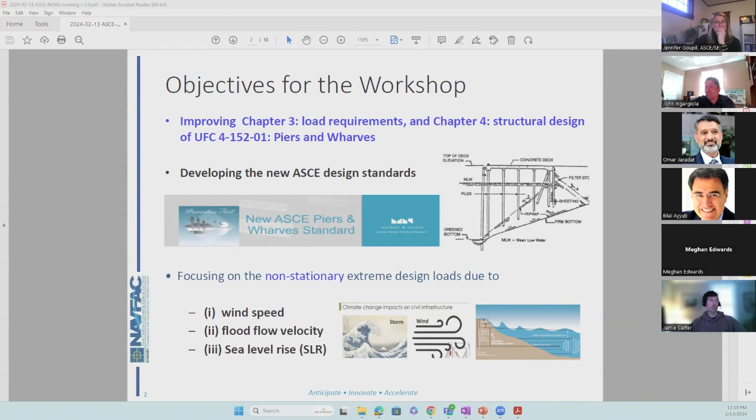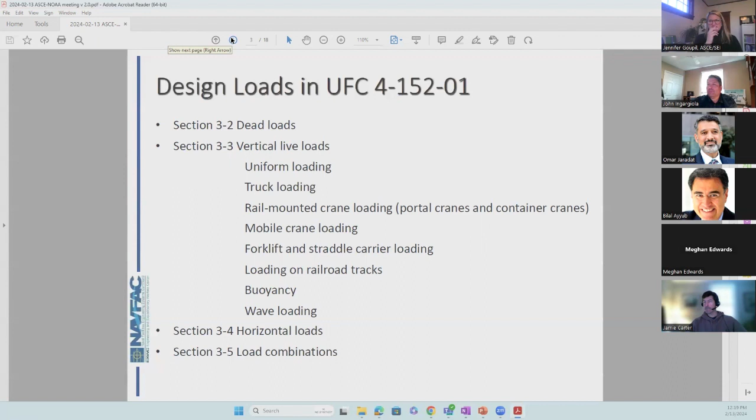Next slide, please. However, when you look at the horizontal load, the berthing load, and the mooring load, wind load on the structure, and the load on the piles, including the current load and wave load, this is much related to the climate changes. It's climate sensitive parameters. That's what we need to consider during the design of piers or wharf. And next slide, please.

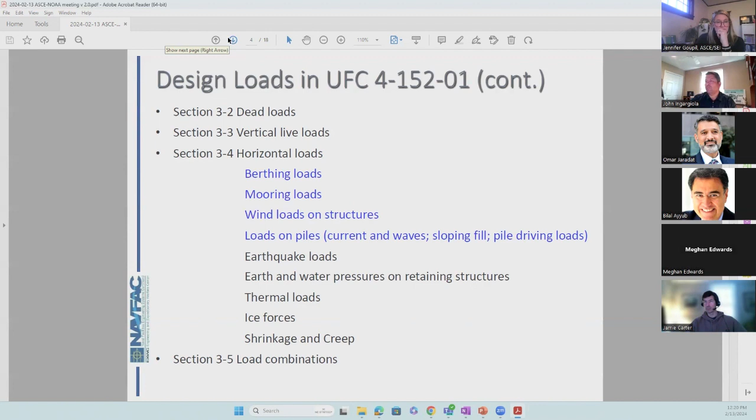Before we jump to the question we're discussing for the workshop, I want to report to you the registration status on my workshop. There were 77 people registered, about 70 people showed up. Half of them from DoD side, 12 people from NAVFAC, 12 people from US Naval Academy or local people, and 11 from the US Army Corps of Engineers and the Air Force. We had 15 industrial people from consulting, and the rest of 20 is university professors, academic. Next slide, please.

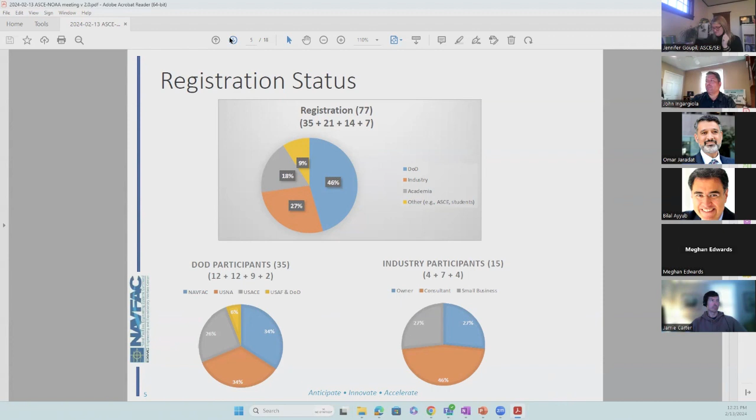Before the workshop, we did a survey, what we want to talk about during the workshop, what is interesting, and the 4 topics: wind, flood, sea level rise, and the resilience. Next slide, please. So this is a summary of what we found out. Only 1/4 of the people interested in the wind, and 40 percent interested in the flood, and 2/3 of people are interested in sea level rise. 3/4 of people all interested in resilience. It kind of surprised me. There's only few people interested in the wind in the coastal area.

I'm guessing probably many of the participants don't understand how to develop the wind load for the structural design. It's complex, so they just take a number from the design code. Most people are interested in the flood damage and the consequence of the sea level rise, and then how to deal with those through the resilience planning process.

This is why the part 2 of my workshop will be held in coming April, I think April 23rd and 24th, 2024 at the ASCE headquarters, Reston, Virginia. The theme of part 2 is resilience planning, life cycle cost engineering, and adaptation engineering.

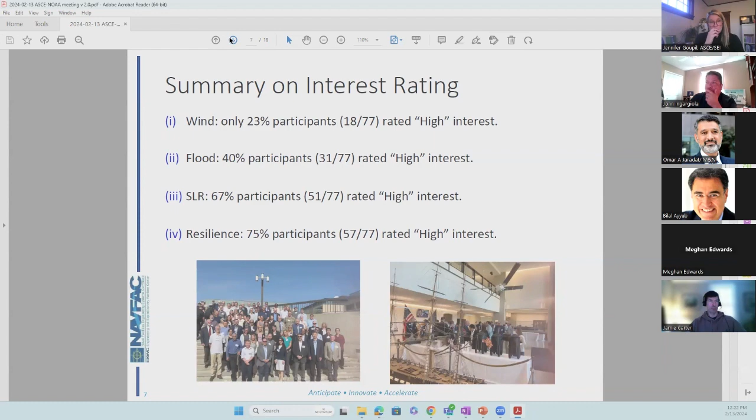Okay, let's jump to what we discussed in the workshop. There were 18 questions. 6 general questions about methodology, 6 questions related to wind, 3 related to flood, and 3 related to sea level rise. The first general question is about the return period. You know, we're dealing with a non-stationary climate scenario. The return period may not be applicable for our case.

I believe your technical memo published last July also talks about these issues. So you have a 1-page column, I see that. We want to be consistent with whatever you come up with from ASCE 7, the future climate consideration. It looks like we're not going to use the return period, but we still mention those.

And the second question is about the risk category. ASCE 7 focuses on the buildings and the public safety. This is not always the case for pier and wharf design, because public safety is only important for the ferry terminals, where the public passengers go. Most of the piers and wharves, there's not many public showing up, but we more focus on the functionality, to make sure of the operation, the pier operation, the port operation, and reduce the downtime.

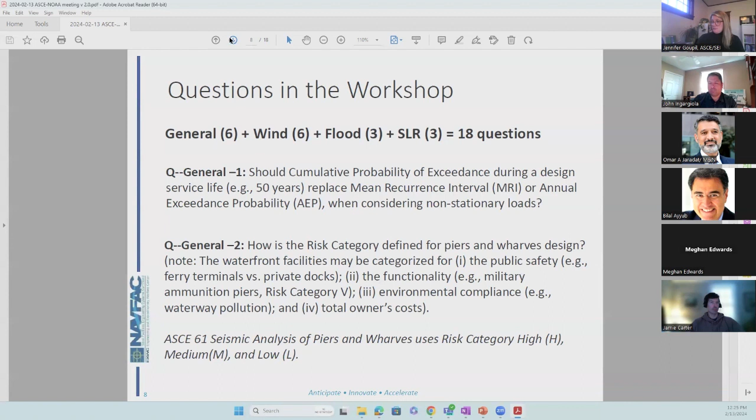The next question is about the uniform hazard design and the uniform risk design. ASCE 61 seismic design currently uses the old uniform hazard design based on ASCE 7-2005. Now we switch to the uniform risk design. So what are we going to do for the pier and wharf design for seismic? Because ASCE 61's approach is uniform hazard design, it looks like we're still going to use the uniform hazard design for the new ASCE design code for piers. But I try to push uniform risk to be consistent with ASCE right now. I will see what happens.

Next question, keep that one, please. Sorry. Next question is related to uncertainty sources. This figure is from your technical memo. I like that. It tells you the source of uncertainty: uncertainty of data, uncertainty of model, or scenario pickup. You can see from here, after 30 years, scenario selection will dominate your uncertainty. So this comes to the next question, the time frame. Next slide, please, Meghan. Yeah.

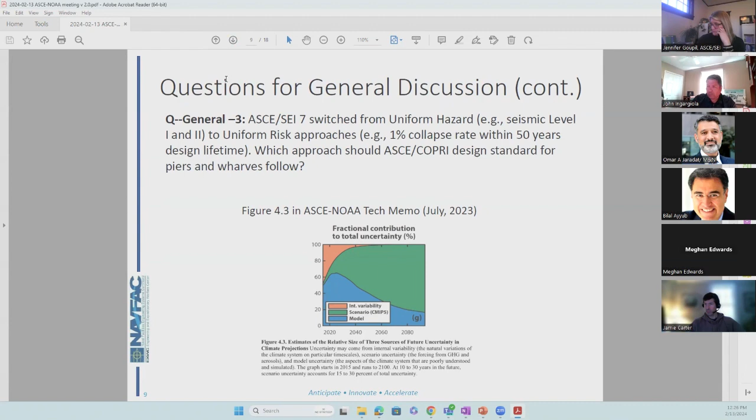What time frame should we design for? There's 25 years already in the UFC requirement, building design life is 50 years, bridges 75 years. The conclusion, I think, is we're going to use a service life of 25 to 30 years, and design life of 50 or 75 years, similar to the bridge, because piers look like a bridge.

The final general question is the balance between the current design code and resilience planning. Structural design code is focused on structural safety and lifecycle cost, at the component level. Resilience planning is at the community level, focused on rapid functional recovery. Those are two different things. So we had a little discussion to see what we're going to do for these two different things. Next slide, please.

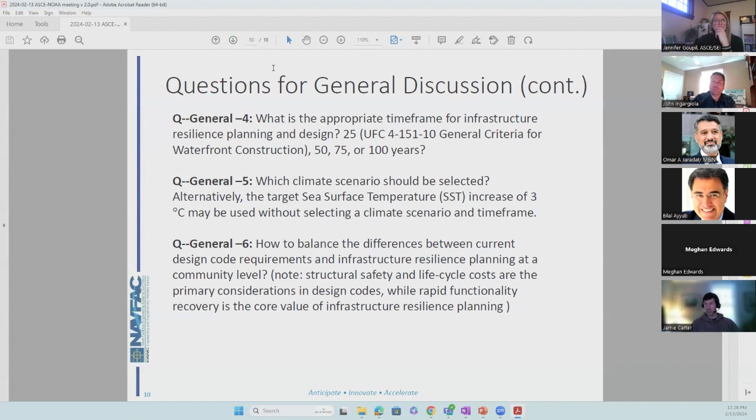Okay, now we move to the wind discussion. There are 6 questions. The first one is, for future wind prediction, are we relying on modeling, or what's the role of historic observation data? It looks like we mostly use observation data to validate the numerical models, and future predictions still rely on the model, because non-stationarity means historic data is no longer good enough to predict the future. And there are many AI and machine learning people doing this kind of thing. It's very interesting to see what comes out next.

Another thing is whether tropical storms get included for piers. Our understanding is the ASCE wind map is primarily focused on inland structures. The wind speed and wind categories for piers, which are over the water, are different than for inland buildings. That's our discussion, what are we going to do?

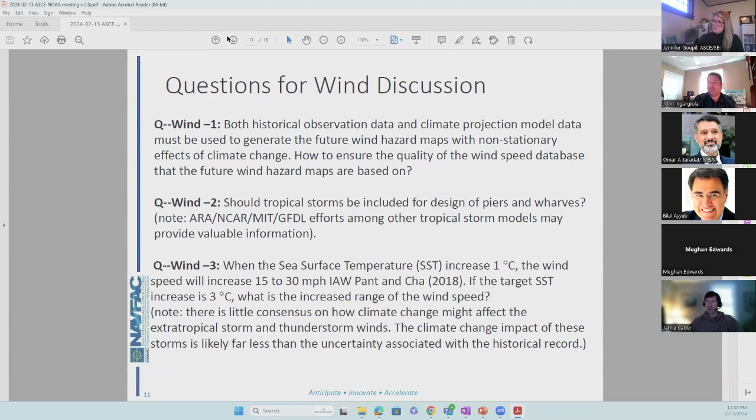And also, if SST increases by 1 degree, some studies say a 15 to 30 mile per hour wind increase. Is that true or not? It turned out it's probably just one individual study, not quite true, because of uncertainty in the current wind map, and there are different opinions. I think Peter Vickery developed the ASCE wind map. His opinion is the uncertainty in the existing wind map is already large enough, so the climate change effect is really questionable. Okay, next slide, please.

So next one is, because we are facing the water, the structure is in water. So are we using exposure D, any simplified method, to just get one number? Answer is yes, we're going to do that.

Two more wind questions, about the mooring load. This is very new for the structural people here, they never heard about it. The mooring load is when the ship is parked next to a pier, there's a cable connecting them. So when the wind moves the ship, they generate the load. So wind and mooring load are highly correlated.

Mooring load applies to the tension, pulling out the pile or the structure. And there's a potential impact to the horizontal on the structure. And also the cable direction, because when sea level rises, the angle of the mooring cable does make a difference. So these are very special issues for the design of piers and wharves, never considered by AASHTO for bridges or by ASCE 7 for buildings. Next slide, please.

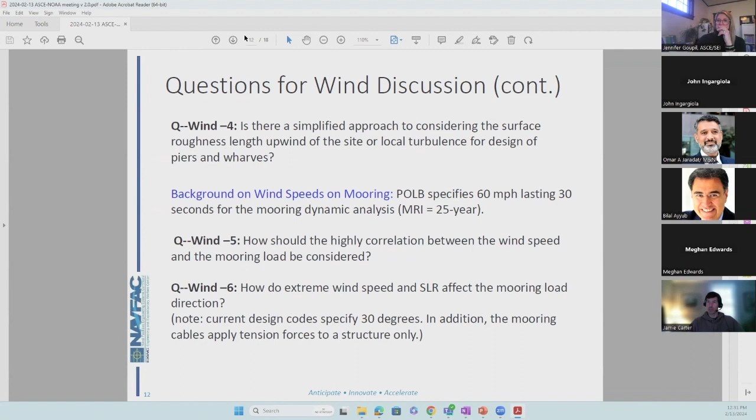So this slide shows you a little bit what the mooring load looks like, just for your information, very brief. They actually have four kinds of mooring service type. Type 1 is called mild weather, which means when the wind speed is more than 40 miles per hour, the ship has to leave the pier. There's no longer the connection, they have to leave. And the storm mooring is designed for 74 miles per hour wind, then they must leave.

They also have type 3, heavy weather, which means during the hurricane, the ship is still docked at the pier because the ship is in repair, there's no engine, they cannot move, or for other reasons they have to stay there. And the fourth one is permanent. Some piers are converted to a restaurant or a museum, and this will be there forever. There are different requirements for the wind speed.

Right now, we are trying to establish the wind model for different types of mooring service. The mooring load is also affected by the tide and all kinds of those things. It's kind of complex. That's one issue we're facing for piers and wharves, very special for this design code. Two more things I want to mention: for the pier mooring design, we use the 30-second wind speed, not the 3-second wind gust. So when you convert the number from the ASCE 7 map, there's a factor of 0.851 to 0.873, a 13 to 15 reduction of the number.

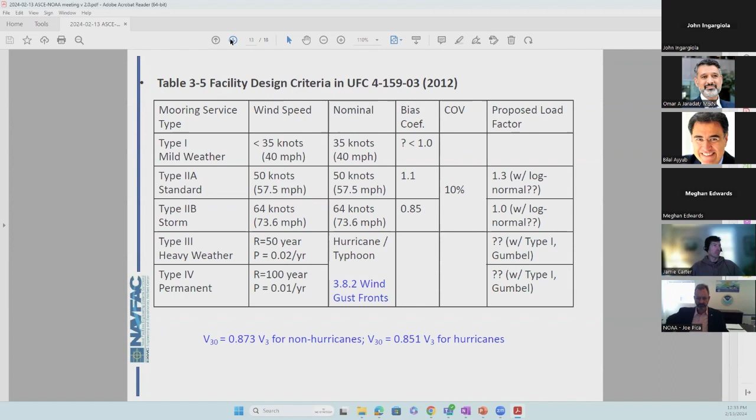Second, more important, is the wind gust front. This is unique. Next slide, please. When the typhoon comes, you see the vertical is the wind velocity and the horizontal is time. The wind speed can change, can double, from 20 to 40 miles, whatever the number, in one minute, at most two minutes. At the same time, the direction of the wind will change, minimum 30 or 40 degrees, like a hurricane, applied to the mooring. This short moment creates a large mooring load and breaks the mooring cable, or other damage happens. So this is very special. So how we're going to deal with those mooring loads, that's a special thing we need to talk about. Next slide, please.

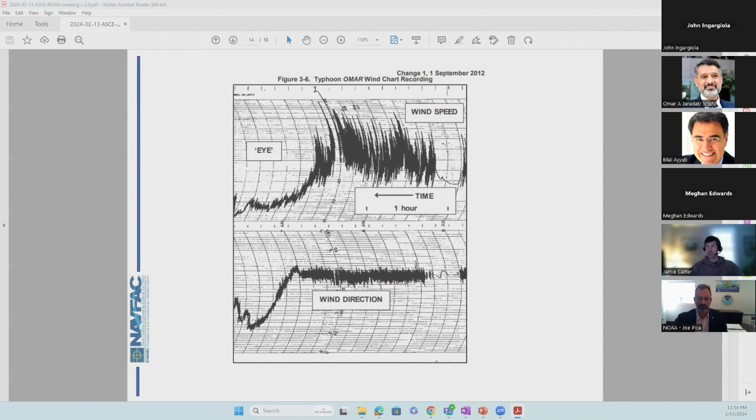Okay, two more slides. And this is flood. Three questions. First is how we deal with non-stationary flood. ASCE 7-22 will provide a scaling factor. That's a big table there, but that's not for non-stationary anyway. So there's a local effect. They have a table, but coastal flooding people generate different models to predict local effect and non-stationarity. And the famous one is NOAA's model, as well as FEMA, also USGS.

And I went to a workshop from UCSD, University of California, San Diego. There's the Scripps Institution of Oceanography, there's coast. And Oregon State University, and Hawaii, they have their own model. Which one do we use? So my opinion is we should follow ASCE 7 for the general framework. For the local effect, maybe we can allow them to use a particular model for the port, the harbor, whatever we can. That will be in the future discussion.

Compound flooding causes a lot of damage, and is the focus. And we are focused on the pile-supported design for structural purposes, because most piers are supported by piles, steel piles and precast concrete piles. The final one is about the extreme water level.

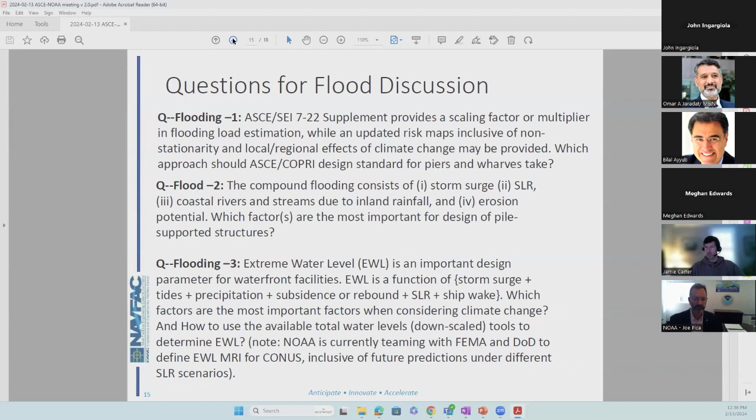It's about sea level rise. Sea level rise discussion for us is focused on tools. We know NOAA has a model. DOD has the regional sea level, DRSL model. The question is which one to use? And the answer is very simple. DOD installations must use the DOD tool. And the city around it, local government, uses the ASCE NOAA tool. They're slightly different. You see there's an example, but we don't think it will cause a major issue because

the differences are very small. Another thing is DOD allows two approaches to deal with sea level rise, which one we're going to use. And when you design the seawall height, you have to combine the sea level rise and the storm flood. So currently the U.S. Naval Academy uses 75 years sea level rise plus 50 years return period. Can we add it up? And the client says, yes, we can do that. So as long as you pick the number you are comfortable with, you can do that.

So next slide, please. This just shows the two approaches for sea level rise currently approved by the UFC, by the DoD. Everybody in the DoD has to use those. The first one just depends on ASCE flood design class 1, 2, 3, 4. You either add 0, 2 feet, or 3 feet. Very simple. You just say how important your facility is, adding 3 feet is the most conservative.

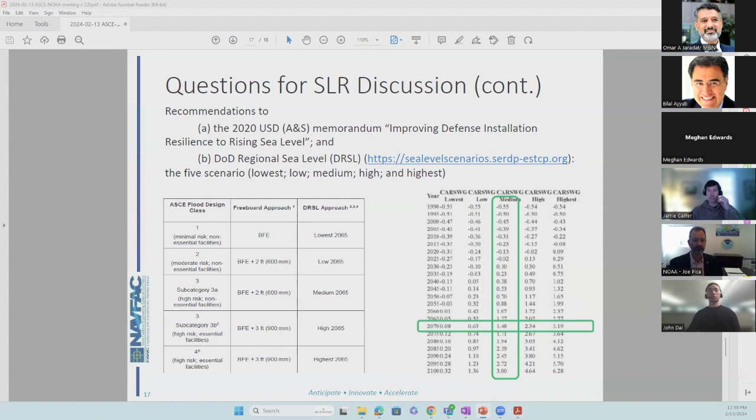All right, questions for Ming? Omar, do you have anything you want to add?

Just want to summarize some of the points we discussed last week in our committee meeting related to this. Very quick, four points. We are looking at using performance-based design for the new ASCE standards for Piers and Wharves. Looking at, like Ming mentioned, risk category definitions. We're going to adhere to ASCE 7 risk categories, but we're going to modify them to make clear this is for marine structures. So just adjust them to meet our needs.

And then we have a big focus on efforts to work on load factors specific to the marine environment, container terminal access for live loads, load factors for wind load, mooring and berthing, wave and current. There is a lot of need for research and specifically collecting data to support our efforts. And Ming is taking the lead on this one to lead a team of experts to help us come up with load factors. We have other committee members already collecting data and coming up with load factors for this effort.

And then we are going to use ASCE, NOAA, FEMA, USGS data tools. We'd like to understand how the data tools from these entities can be used for marine structures or the marine environment close to the coast, if the data needs to be modified or made accurate, since some of the data in ASCE is mainly for land-based, and we do a lot of coastal modeling to calculate loads and wave loads on the marine structures.